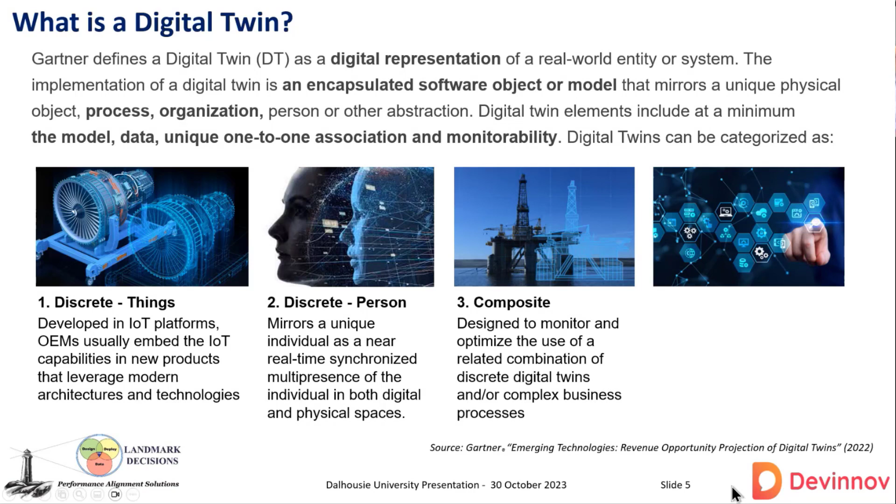The second one is the interaction of people with, let's say, an object, or imagine a building. We can imagine people inside the building and you want to model everything that happened inside it. Something quite different from the industrial aspect is health activities. We can imagine a person, you put some sensors inside the person, and you can monitor their health. Using a model, you can say if the person is in good health or dying, or not. The third one is a combination between 1 and 2, for very complex systems like a platform, any kind of ship, plane, and so on.

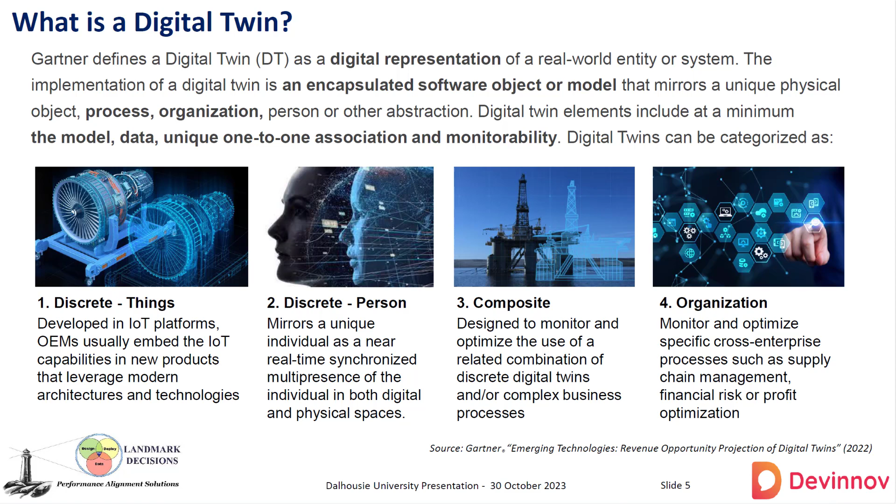The last one is what Gartner calls an organization, so it's a digital twin of your organization, which is called DTO. What's the definition Gartner proposed about the DTO? It's a dynamic software model dedicated to your organization. The point is to understand exactly how your organization is functioning, what's the current state, and what happens if you want to change something in your organization. Using this model, you can imagine what the change will be. You can adjust some resources - we'll see that later - and of course we can measure the customer value.

So again, following a Gartner approach, it's like a journey. Imagine you want to develop a DTO. You start by your business model, you create the model of your organization, you measure or assess the performance of your model and organization. And using BI software, you can get all the information from your model.

And based on that, you act to do what you want. And we will give you some example of what we can do with a DTO to increase the value, not only the customer value, but the value with a big V of your organization.

Great, so I'll pick it up from there. So as Regis points out, it's a bit of a journey. And to support that journey for a DTO, there's a variety of technologies. So in Gartner's opinion right now, there's no one technology that meets the full breadth of those building blocks.

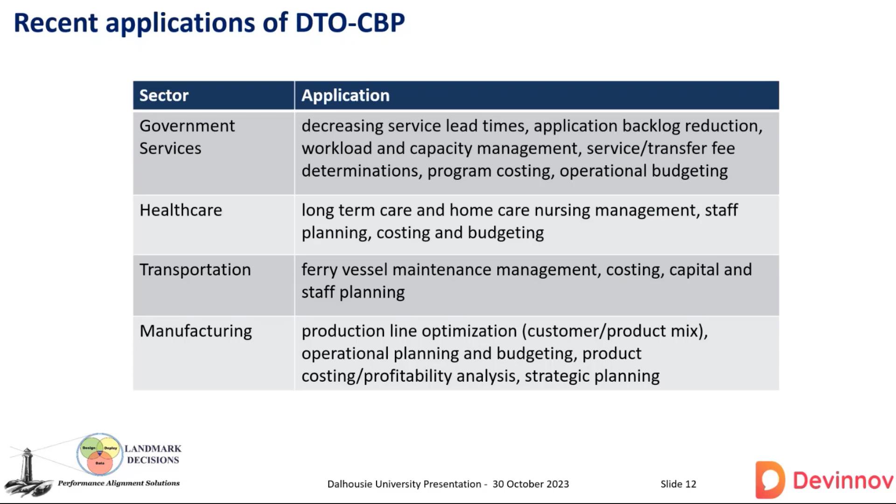So, let's jump into Crosby's. It was originally a Nova Scotia company, started in Yarmouth, and about 15 or 20 years afterwards they decided they needed a better port, so they moved to St. John, New Brunswick, where they've been since the 1890s. So five generations, still in the family, run by the Crosby brothers.

So they do the formulation and packaging lines, basically production for that. So still a kind of small to medium-sized manufacturing business per se.

They took this approach probably going back 2 years now. Senior leadership, actually the CFO, we do a lot of training with CPA Canada, CPA Nova Scotia in the accounting world, because it's a costing tool as well. He came to a workshop, right place, right time, and said, hey, we need better costing. So we started an engagement with them.

This is very typical of how a project would roll out. You create a multifunctional team, so you need people that understand the process out of the production area. If your company has a continuous improvement or lean focus, great to have them involved if they're not part of production. And certainly finance, because we want to look at costing and budgeting. So they got training both on methodology and on the technology, the CBP product I talked about.

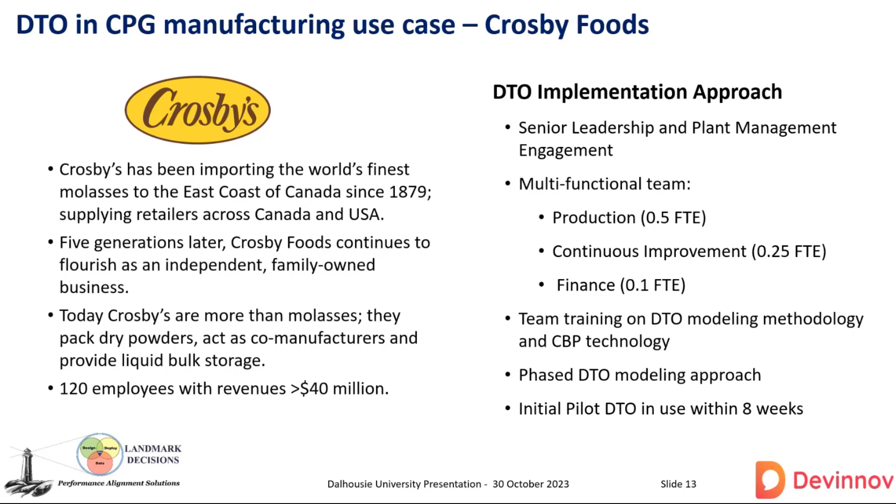With big tanks that, if you've ever been to St. John, you wouldn't miss them. So that was a little bit about the approach.

I thought it might be interesting to see this concept of real versus digital. So I have a little video here, we'll show one of their production lines for drink crystals, their own branded drink crystals. In this video you'll see things around the bill of materials, different components that go into the product itself, and some direct activities. What you won't see, but we'll talk about, are the indirect activities, and sometimes those are the killers.

The downtimes, the breakdowns, the changeovers, the setups - those are the things that steal capacity away from the line, leading to inefficiencies and higher costs. I'm sure that's probably been covered in many courses your professors have provided. So I'll just turn the sound off and give you a quick guided tour.

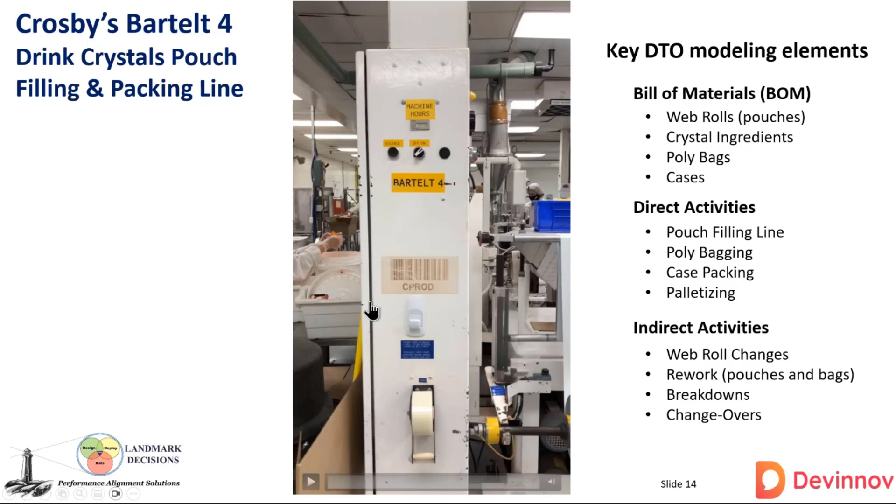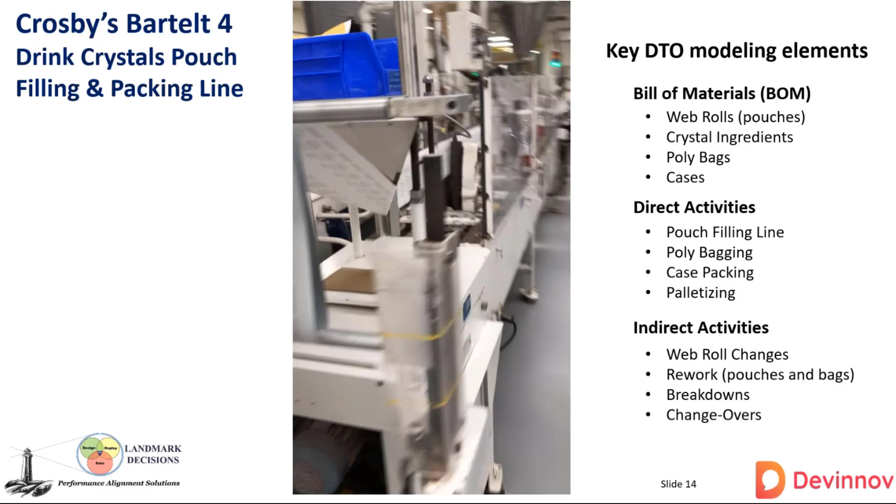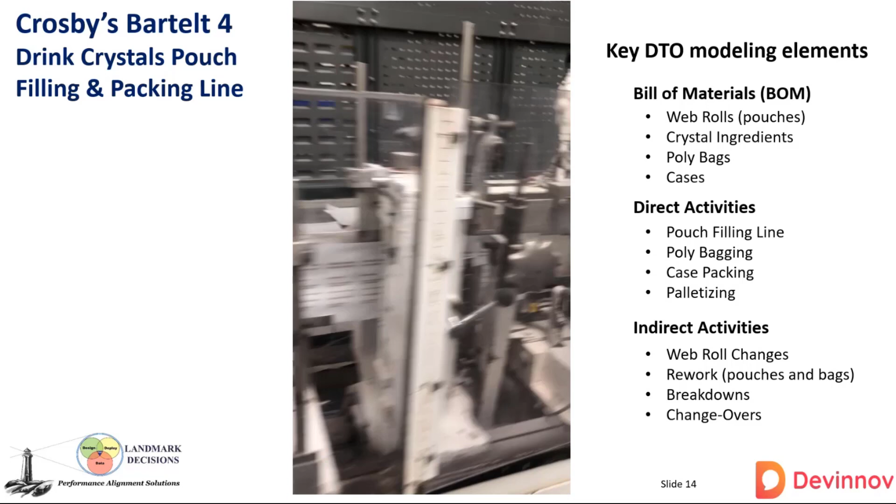This is what's called the Bartelt 4. Bartelt's a German manufacturer, fairly old piece of equipment, probably been around about 30 years. This is the web roll, where all the pouches are contained, and then they're formed into this white label kind of pouch - they're coded, date stamped, so every packet has the product. They're cut and heat sealed on the sides, and then they're open.

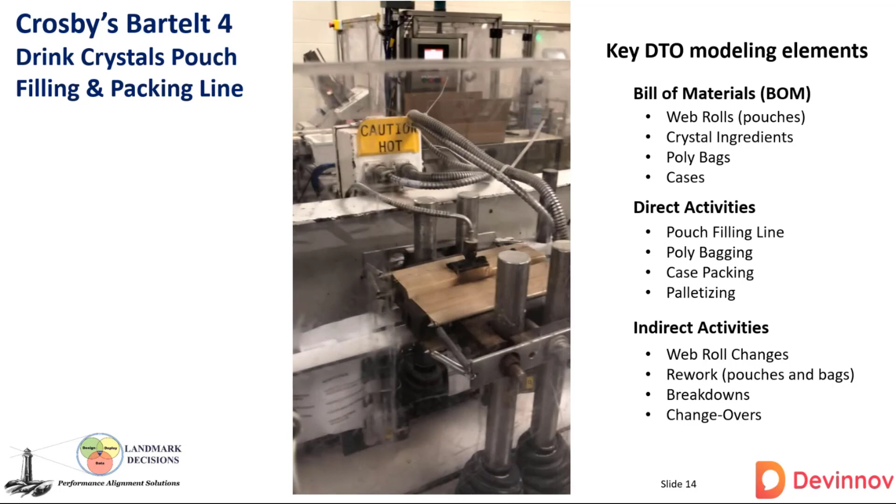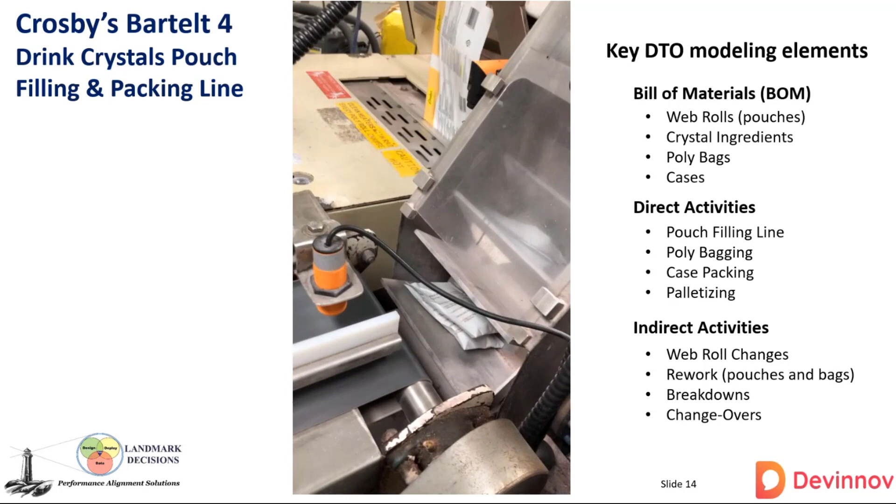So the ingredients flow in. They have a mezzanine where they do all the blending, and those go in a controlled fashion. They're heat sealed at the top and put on this conveyor, then go into what's called the poly bagger - you can see the poly up here. That forms a plastic bag, and this is a collector that takes 3 pouches, inserts them in the poly bag, seals the bag, and they come out the other side.

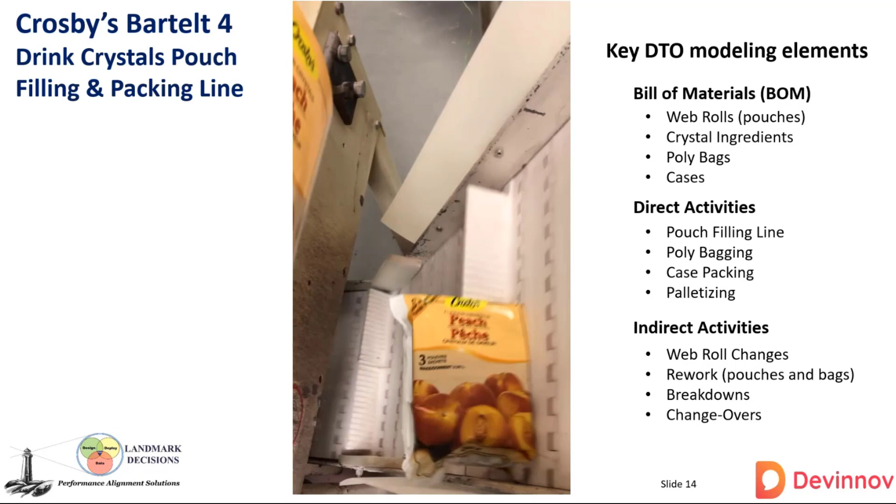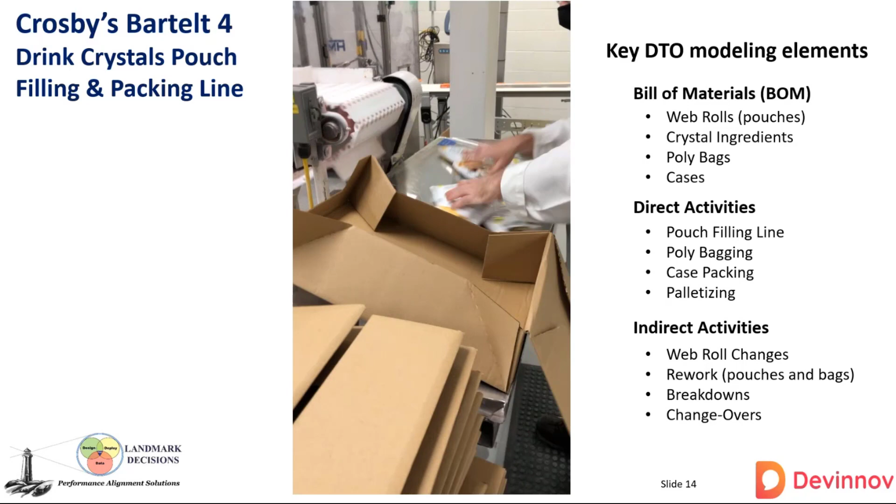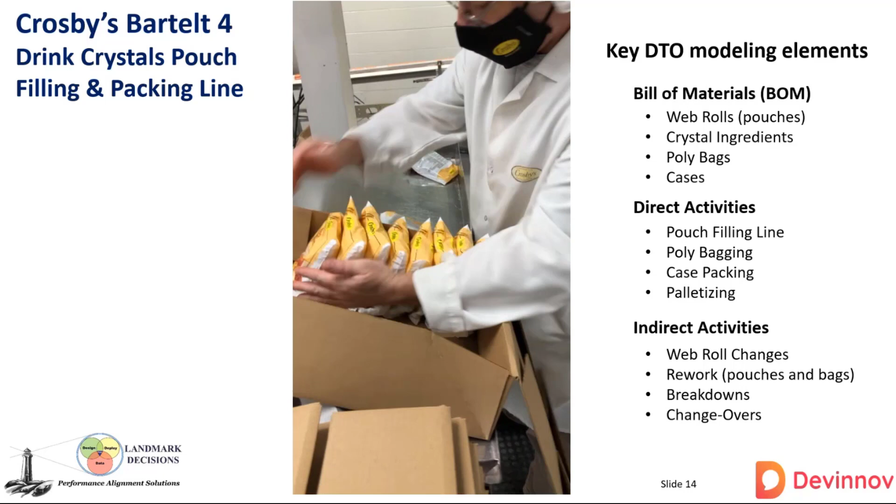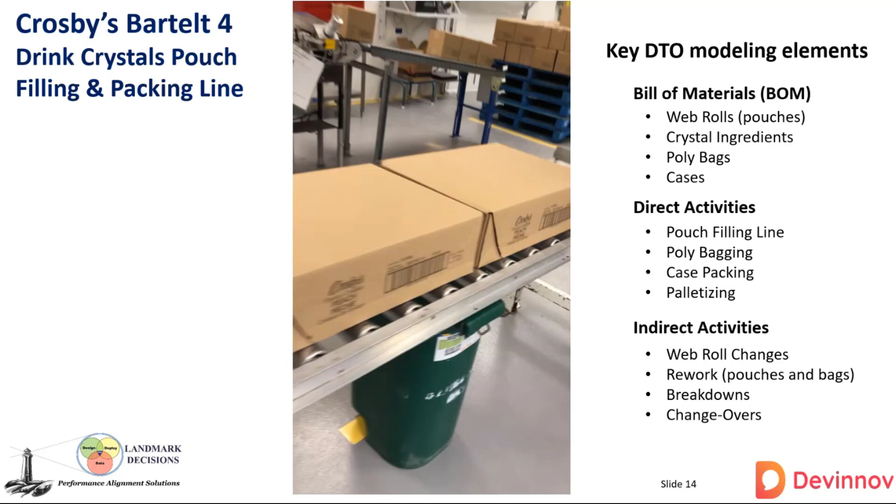From here on it gets pretty manual. They come onto an accumulator table, and some poor bloke has to come along and stick them in the case by hand, hoping he can do it fast enough - probably like the old Lucille Ball episode with the conveyor belt. They come out here, go to a taper, another coder, and again another manual process. They sit at the end there, and then they're hand stacked onto a pallet, ultimately shrink wrapped and sent into the warehouse.

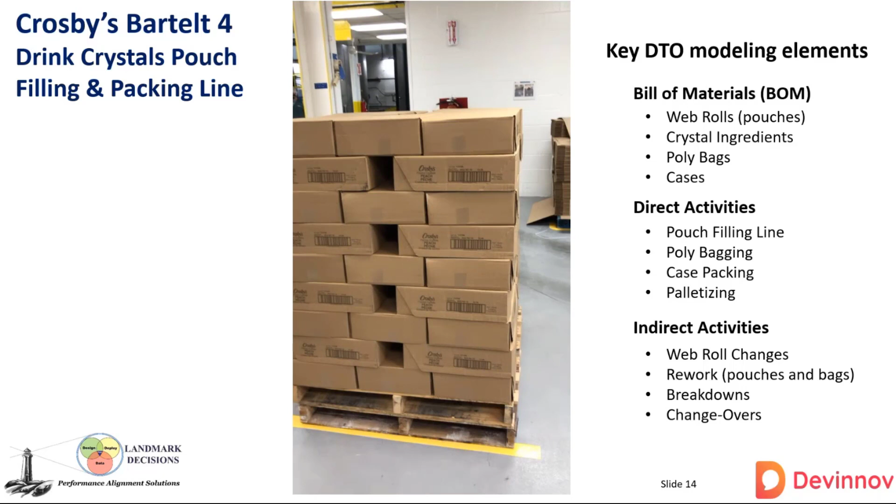And we can also look at total cost of quality. I've just identified two components: one for good quality, i.e. prevention - so don't have appraisal in this one - and one for poor quality, which is internal. Although external product failures are obviously more expensive than internal, we're just going to talk about the internal.

So lead times, PT processing times, percent complete and accurate. How often is that done completely? Which group is responsible for it? And then how many staff do you have, because with that data you can actually calculate your timeline and get some of your lean value stream parameters. So your total processing time, your value added ratios, which are an indication of how much processing time versus total time. You've got your rolled throughput yield, which is the multiple of all your percent complete and accurate - basically an indication of what percentage of the time you get one product right through the line, complete, right the first time, and so on.

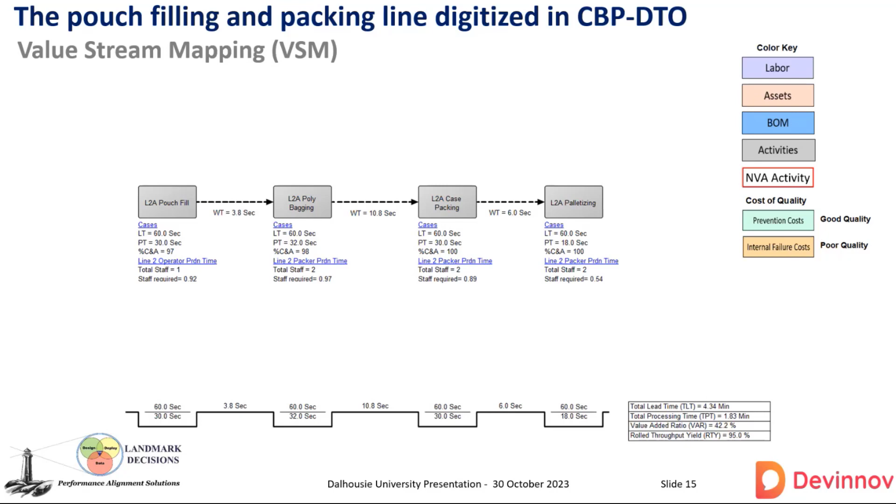Again, we'll see this in the software too, but I thought it easier to explain. Then we can also look at some of these other non-value added activities. So breakdowns being a good example of an asset failure rate. These components will have an impact on your overall average wait times, adding time to your average process throughput - so obviously things you want to minimize.

I didn't point out here that the tool will calculate for you, based on the volumes of these, for any particular time period. These models, DTO models, are typically built over a time period - could be a month, could be a quarter, could be a shift - and you decide what time period this will be modeled for, and the data you use to populate that model comes from that time period selection.

So this tells you basically how much staff you need. And obviously you look at this and say, that's a lot of people dealing with breakdowns. So what can we do to minimize breakdowns? What can we do to minimize changeovers? Can we do longer runs? What would the impact of that be?

And then we've got a lot of other non-value added, like rework. In that process, you saw that pouch filling process - it's an older piece of equipment, so occasionally there's jams, the web doesn't form correctly, so there's waste. There's some recycle maybe of materials depending on where it's caught and so on. Same thing with that bagger - there's jams in the bagger where they're going to lose product potentially, certainly lose the bag. So that's extra labor and takes away from the efficiency of the overall.

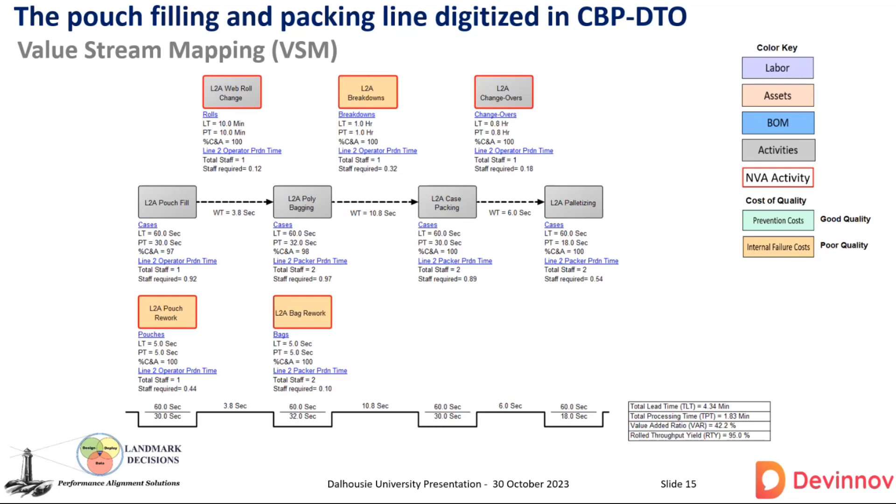So that's kind of what you see as far as the value stream. The activity-based planning - what that is basically is resource optimization. So if we look at the resources necessary to feed that line, I didn't point them out in the video. You might have seen a young lady in behind - she was the operator. And you definitely saw the poor fellow at the end doing his case packing. So operators and packers, we can actually model over time if that's a component that needs to be understood in the process, because it adds capacity, but it adds capacity typically at a higher cost, so we might want to be able to do simulations around that.

There's a bit of symbology here. So these little round pieces are called connectors, and it just allows you to avoid having a big complicated spaghetti network when you move from one item to where it's consumed. So anywhere you see L2OP means it's a line 2 operator that's involved in that particular activity.

Moving down on the asset base, you have the actual line itself, so the line takes up a footprint in the plant - there'll be some plant-related costs, the insurance, depreciation, utilities, and so on. And then how is that line used? Most of it, hopefully, is used for running product. And when you run product, that's really when the machine is requiring electricity, so when it's down for cleaning or down for preventive maintenance, typically it's not going to require electricity. So you want to bring in the resources at the appropriate point of where it's being consumed and so on. There are two other activities.

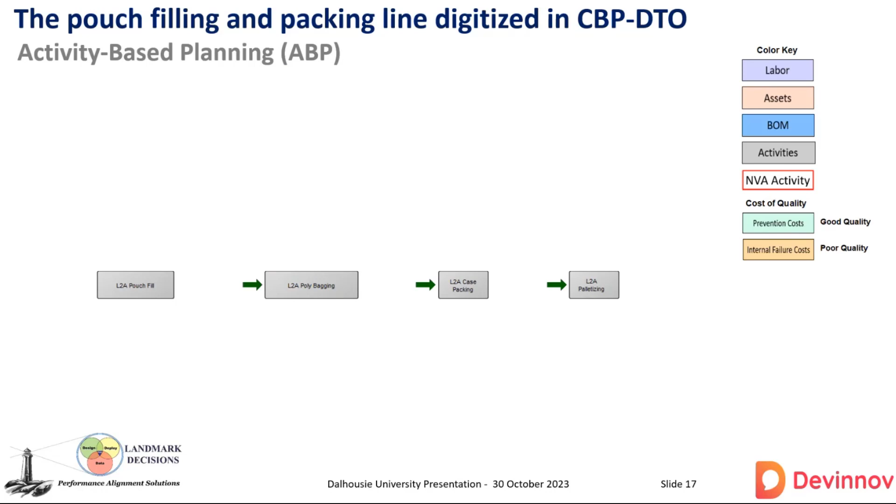That's kind of high level, some of the resources. If we look at where those resources are used, we're back to our 4-step process, and we look at the resources. You can see we've got line 2 operators coming into the pouch filling, overseeing the filling operation, and the packer at the end oversees the polybagger and the palletizing as well.

We see some bill of materials coming in, the actual cases, the poly bags, the web rolls where the pouches are created. We see some support indirect activities like the web roll change. When a web roll in this equipment needs changing, it's not spliced in online—it's actual downtime to remount the web and splice it in, then restart the machine. So there's downtime associated with that web roll. These are the resources to support that.

And down at the bottom, what drives that whole process is the demand for this particular generic product—I'll call it L2A. So I'm going to show you the model. It's all illustrative data, not Crosby data, but it's based on the Crosby experience.

Here's where you have rework, both at the pouch—misformed pouches—or at the bags. Those items basically say, I've got to create the pouch, including making the changes on the web roll, so when I start looking at things like the cost of pouch rework, it's not just the operator time to deal with the bad pouch, but all the costs above to actually create the pouch that is wasted. It really magnifies the importance of rework, and that's quite often new insights for production people.

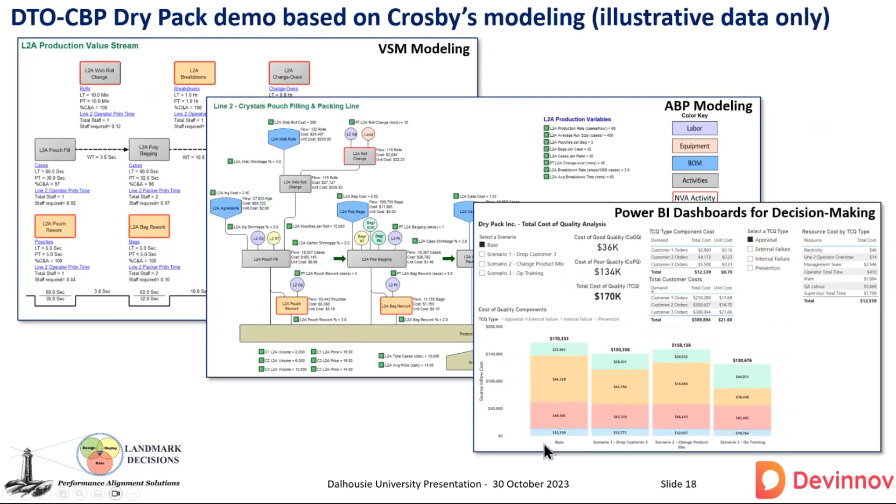We have the other ones, the breakdowns, the changeovers, and so on. I'll be able to show you this in the model, so let me do that. That's my cue to go to the actual model. Let me get out of here and fire this up.

So this is that product I mentioned, collaborative business planning. I just took screenshots in the slides. If I look at some of these resources in more detail, you'll see there's some little green V's around—those are variables we can use in multiple places in the model to give us simulation flexibility.

For example, we have $25 as the hourly rate paid to operators. We only have one operator. It's a monthly model, but within that month there are 40 shifts that are run. We have overtime—in this case, about 20 hours of overtime that would run that month, handling the peaks and valleys.

So even though the utilization of a resource on average for a month might be 85 or 90%, they could still need overtime. If there was a demand product, a shipment that needed to be done, they may have to push that through that day and run overtime that particular day.

If I look a little deeper, I'm going to open up this object—this is the production. You get a bit of information that you can detail, so people can see this. This can actually be published onto the web too, so people can understand the context of the model that put this together. But we start to look at some costs.

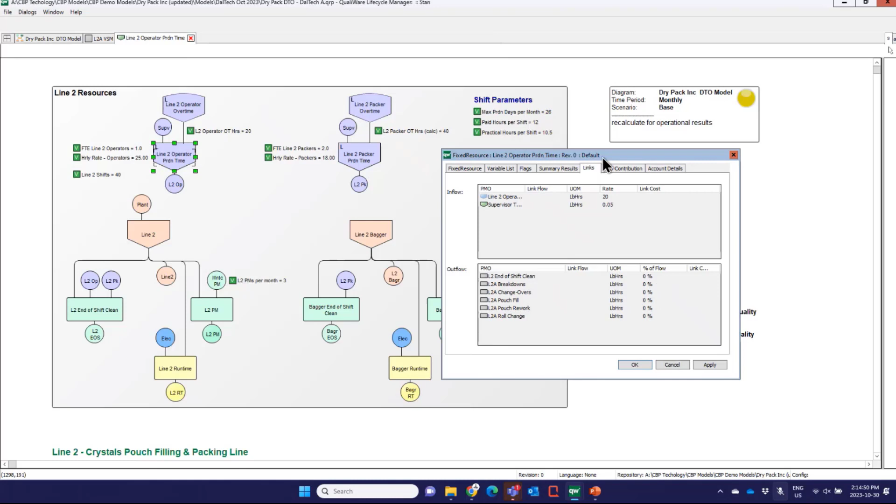This model is currently uncalculated, so everything shows as 0, and it says recalculate here. We'll do that shortly. So just to give you a flavor, I'd be able to open up any of these activities. If I go down to the process area and look at, let's say, pouch fill, for example.

I can open it up and see, okay, here are the components coming in. So there's my operator coming in. This tells me the consumption rate of how much time the operator uses, in terms of hours.

So labor hours, 0.008. What does that mean? 0.008 hours per case. The units of measure on this are per case. You've got to be careful when collecting and putting your data in that it's relevant to the units of measure by which you modeled.

And that's certainly a decision that's made. Typically, you'll model based on the way the business thinks about its throughputs and its efficiencies and so on.

And then down here at the bottom, we've got this product. This is just one product line, an illustration. So there's a bigger model behind this, but for today's purposes, some of the other drivers of that scenario: they've got 3 different customers, customer 1, 2, and 3, that buy product L2A at different rates. So the more volume you buy, typically the lower price is going to be offered from the company.

And then we just summarized some of the production variables here. So our production rate, our average run size, pack configurations, how many pouches per bag, how many bags per — these are all used in the determination of resource consumption.

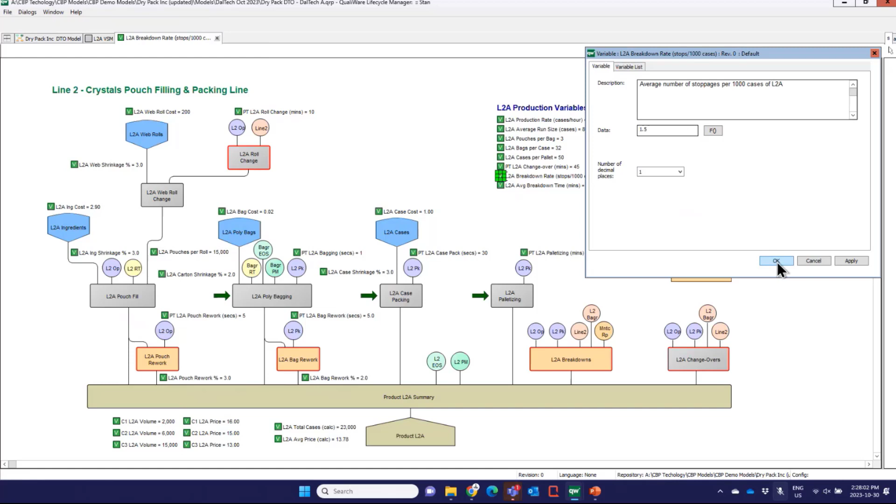My changeovers, we can leave those the same - they're still going to take the same time to change over. But the breakdown rate, if we can cut this from 3 to 1.5, we'll just cut that in half. And we'll take our breakdown time down because now they don't have to be down as long. Let's say we could take that down to 30 minutes.

So this is what maintenance tells us that they think better PMs would do for us. Production comes and says, well, geez, if you're going to fix that problem, I'm not going to get as many jams in my pouches, so maybe I could reduce my rework rate from 3 to, let's say, we'll cut that in half, just as an illustration. And I'm going to cut my bag rework by 50% as well, so take it down to 1.

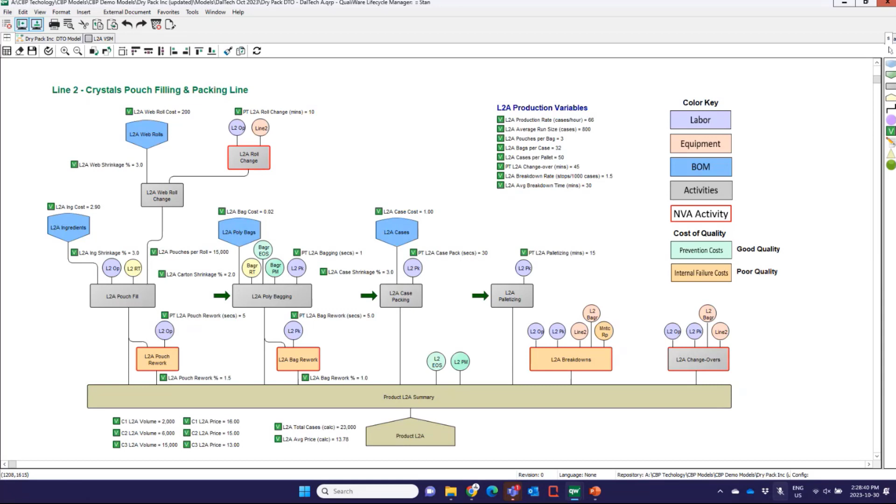So I run a bunch of different ideas around this concept of having better preventive maintenance. What would the impact of that be? So I run that model, and okay, now I'm in the black. This is good, but we're not quite finished, are we?

So we've got to look now at our utilization. We're really underutilizing our labor now. Remember, we took it up to 44 shifts - we definitely want to go back to 40. In fact, we could probably go a little further, we don't need as many shifts.

So if I could take that down, let's say to 34, I'll see if that works. Take it down to 34 shifts. Okay, no broken constraints, I'm back in the mid 80s, high 80s. So again, I probably don't want to go right to 99% - that's false economy, so I want to kind of keep it at the same level, unless I'm going to make it around. Yeah, exactly.

And now let's do the financials. So I've just generated $20,000 of profit, even though I've had higher costs of maintenance. But now my production rate, my better utilization of my equipment, reduced waste, reduced costs of bill of materials, all of that. And of course, all this information you can analyze.

With regards to maintenance and stuff, is there a way to tie in your maintenance decisions to cascade into those other things? Or are you kind of having to get around the table with a bunch of people and hammer out what those numbers would turn?